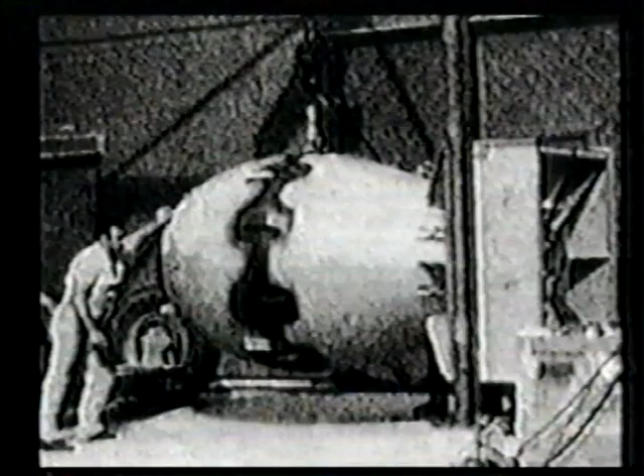In 1939, at Adolf Hitler's request, the Nazis were developing a bomb that would be so powerful and destructive they would surely win the war. Scientists were researching the possibility of taking radioactive particles and splitting them apart. Albert Einstein wrote a letter warning President Roosevelt about the plan and its implications.

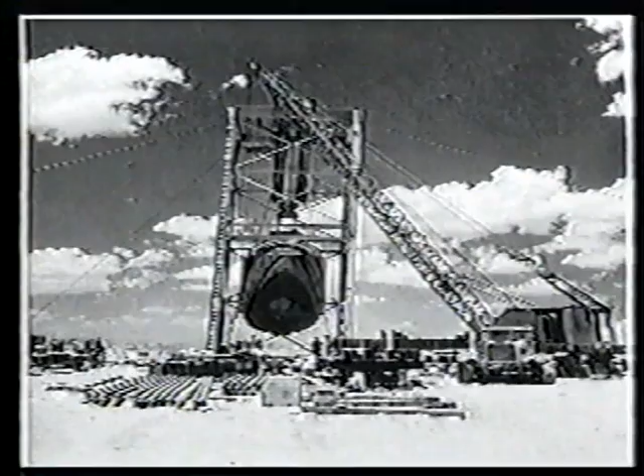The U.S. military initiated its own top-secret research program. It was called the Manhattan Project and was supervised by General Leslie Groves. In the development process, American scientists knew the hazard of chemical radiation poisoning to both researchers and the environment would be significant. Part of the Manhattan Project involved development of a new type of filtration that could be used in research facilities where radioactive materials were used, such as Los Alamos Laboratory in New Mexico.

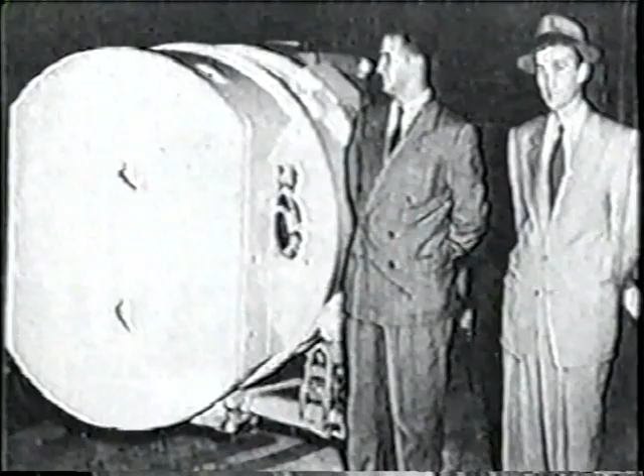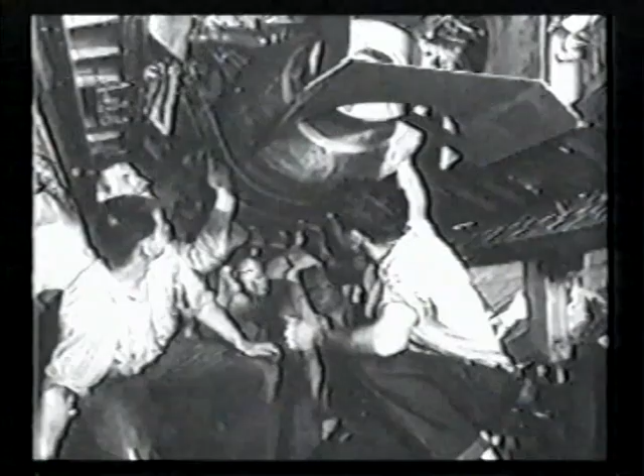The Arthur D. Little research firm was contracted to develop this new type of filtration. The new filters must be so sophisticated that even microscopic particles 1/300th the size of a human hair would be trapped. Ironically, they did not have to look far to find what they needed. British agents had smuggled top-secret plans out of Germany for a new type of gas mask filter that used microfine asbestos paper. The Arthur D. Little research firm decided to use the same design, improving it where they could.

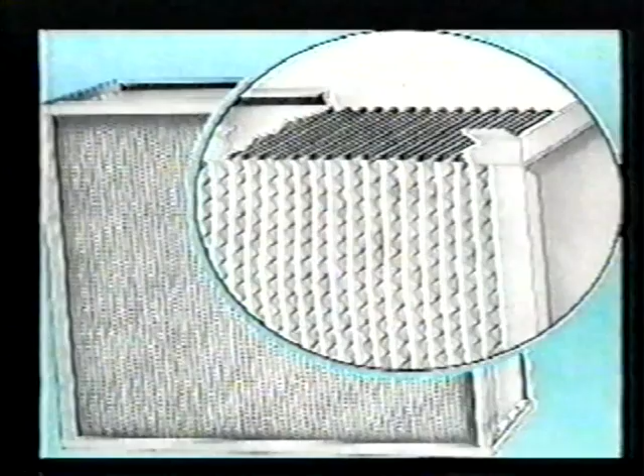The resulting filters were called nuclear filters, or absolute filters, because they were believed to filter out absolutely everything. Without a doubt, absolute filtration helped make possible the development of the atomic bomb. After the war was over, and after the plans for absolute filtration were declassified, the Arthur D. Little Company started a separate company to manufacture and sell their filters. The company was called Cambridge Filter Corporation and would be a commercial enterprise marketing absolute filters to the fast-growing nuclear power industry.

In 1961, an engineer named Humphrey Gilbert first used the term HEPA to describe these high-efficiency filters. HEPA was an acronym for High Efficiency Particulate Air Filters. Ironically, it wasn't until the early 1960s that Cambridge and other HEPA filter manufacturers stopped using asbestos paper in the filter media. Within a few years, HEPA filters would be one of the chief lines of defense against the very product they were once made from, asbestos.

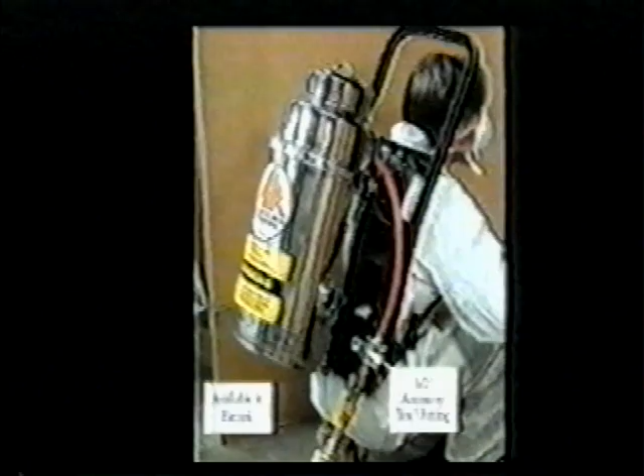So what's so special about HEPA vacuums? They cost a lot more than conventional vacuum cleaners. Is it really that big a deal? An average upright vacuum with new filters may have an efficiency of anywhere between 50 to 75%. This means that 50 to 75% of the particulate is captured by the filter. This also means that 25 to 50% is exhausted into the air.

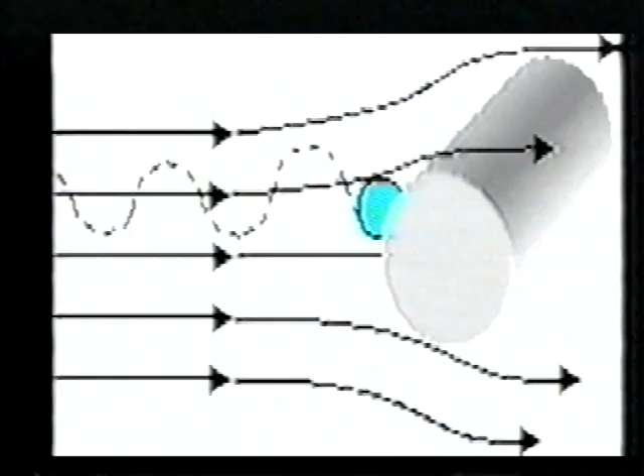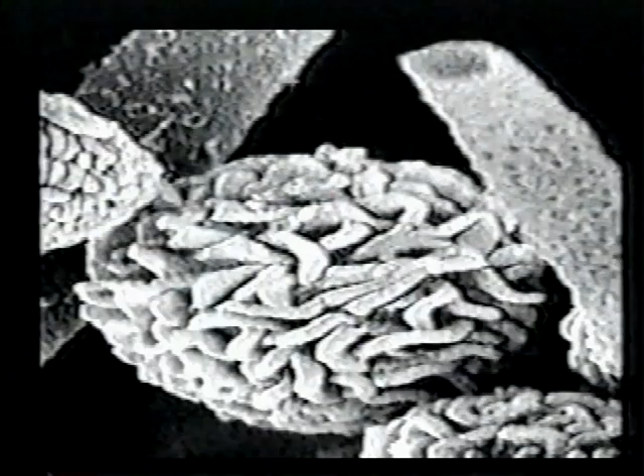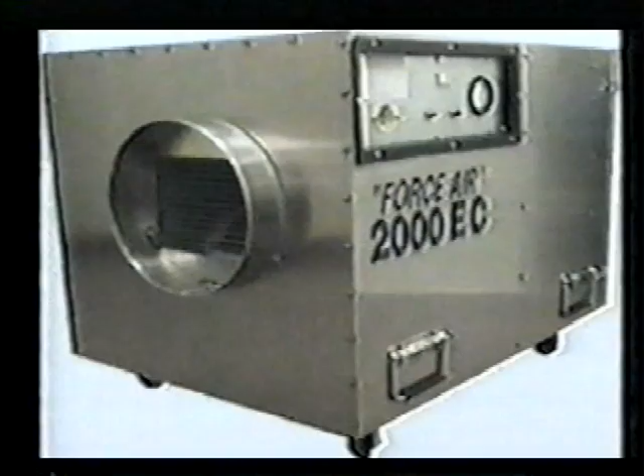As the filters collect more and more debris, the efficiency is actually reduced, and a greater amount of particulate is exhausted. If a vacuum is used to pick up hazardous materials like asbestos, mold, or lead, the most dangerous particles, the invisible ones, are the most likely to become airborne. Microscopic particles of asbestos, lead, toxic mold, or other hazardous materials can stay airborne for hours, even after the vacuuming stops. For this reason, state and federal regulations require the use of HEPA vacuums, HEPA-filtered respirators, and HEPA-filtered exhaust systems whenever hazardous materials are being disturbed.

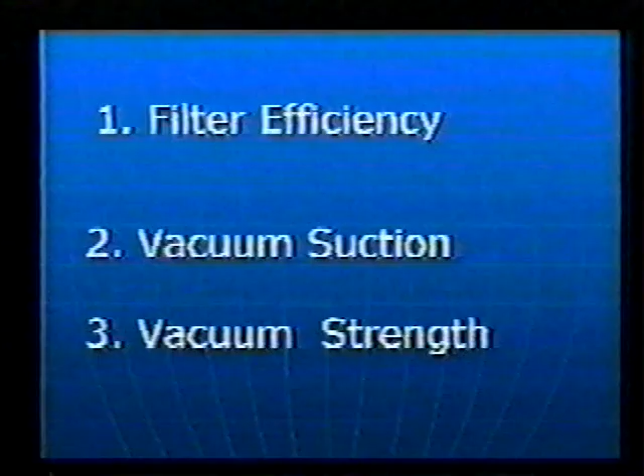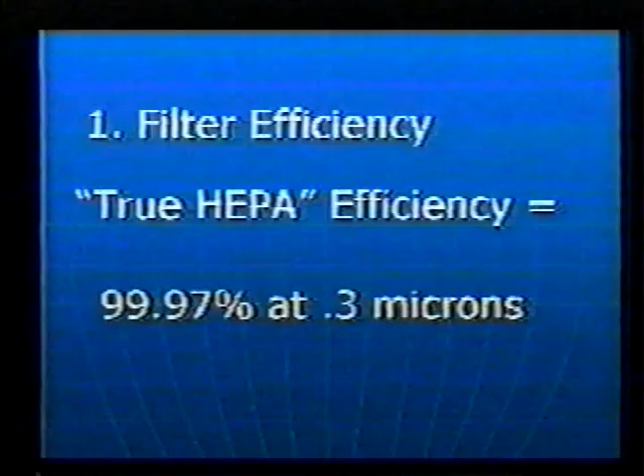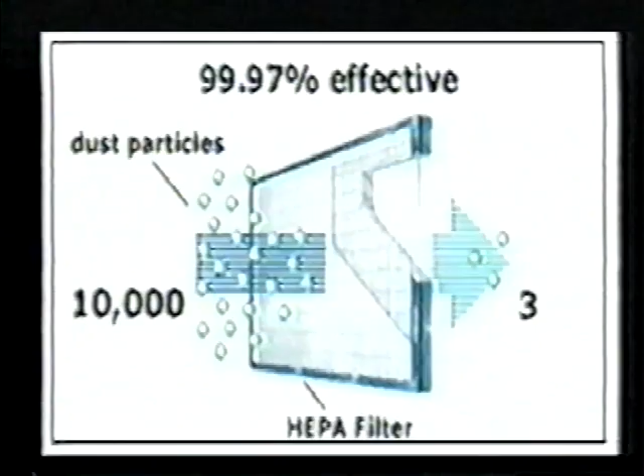HEPA vacuums are rated in several ways: filter efficiency, vacuum suction, and vacuum strength. Filter efficiency is listed in a percentage. For example, true HEPA filters must capture 99.97% of the particulate down to 0.3 microns in size. That means that for every 10,000 particles in the air or on the ground, only 3 may get through the filter. HEPA filters must also capture particulate down to 0.3 microns.

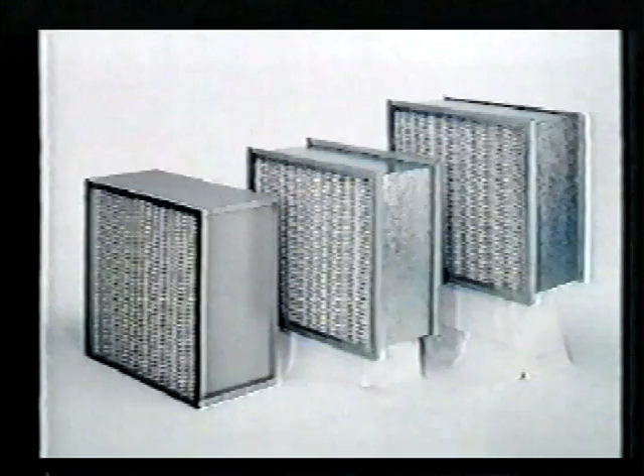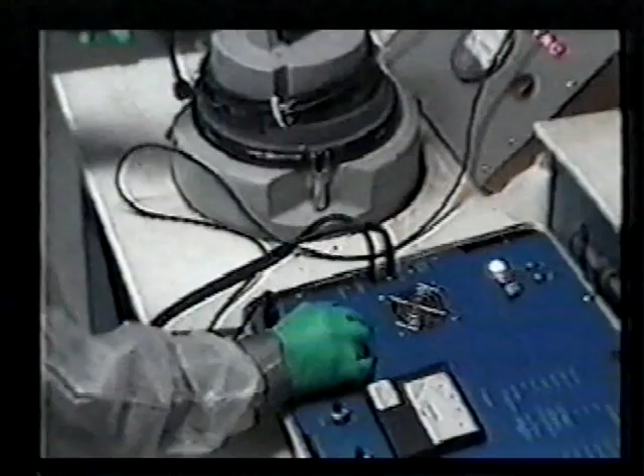A micron is 1/millionth of a meter. A piece of household dust might be 2 or 3 microns in size. 0.3 microns is 1/300th the size of a human hair. HEPA filters must be tested and certified to be 99.97% efficient down to 0.3 micron sized particles. Any filter that does not reach that standard is not to be used in hazardous material pickup. A second measure of vacuum efficiency is the amount of suction. This is often stated in terms of cubic feet per minute, or CFM.

CFMs are the amount of air the vacuum can draw in 1 minute. The minimum CFMs for a HEPA vacuum should be 85 to 90 cubic feet per minute. A third measure of vacuum efficiency is the power or strength of the suction.

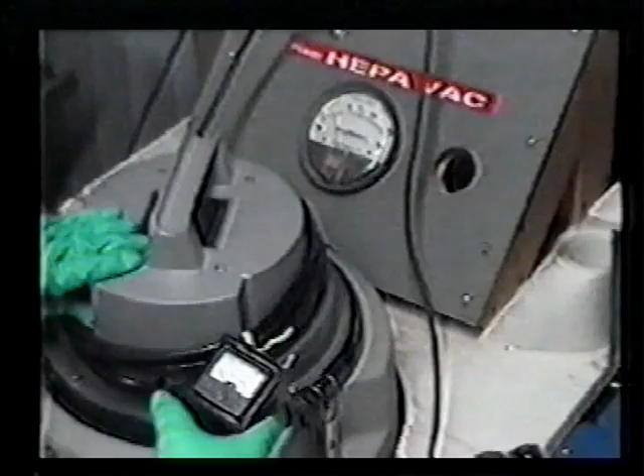CFMs measure the amount or velocity of air. Water column lift, or WC, measures how strong the suction is. Water lift is measured with a pressure differential, or magnehelic gauge. If you took a 1-inch tube with water in the bottom and held it vertical, how high would the vacuum sweeper lift the water? This is what a magnehelic gauge measures. You should look for a vacuum that has at least 60 inches of water column lift.

And don't be confused by horsepower or amperage ratings on vacuums. They don't really give a good base of comparison between various models. Just because one vacuum has a 2 horsepower motor and another has a 5 does not guarantee the 5 horsepower has better suction. It's best to look at CFMs and water column lift.

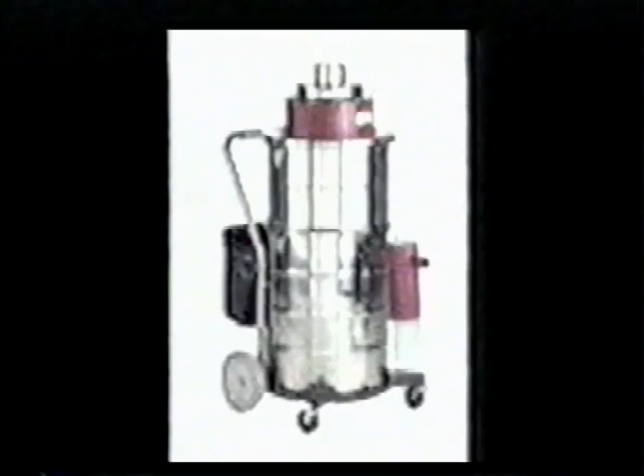In order to give true HEPA filtration, filters must be tested. HEPA certification is regulated by the American National Standards Institute. In order to be certified, a HEPA filter must be challenged with an aerosol known as dioctyl phthalate, or DOP. DOP is a type of oil with standard-sized molecules.

DOP aerosol is introduced to the upstream side of the filter and the vacuum turned on. A special light-sensing meter is then used at the other end to measure if any of the microscopic particles are able to penetrate the filter media.

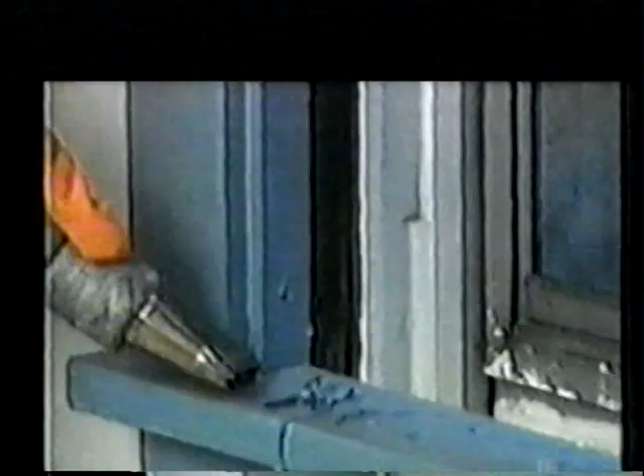At Fortress Environmental, we not only require that HEPA filters be DOP tested by the filter manufacturer, we also test them again ourselves after they've been installed on the vacuum head. This way, you can be confident that your HEPA vacuum will function at peak efficiency if used in accordance with manufacturer's specifications.

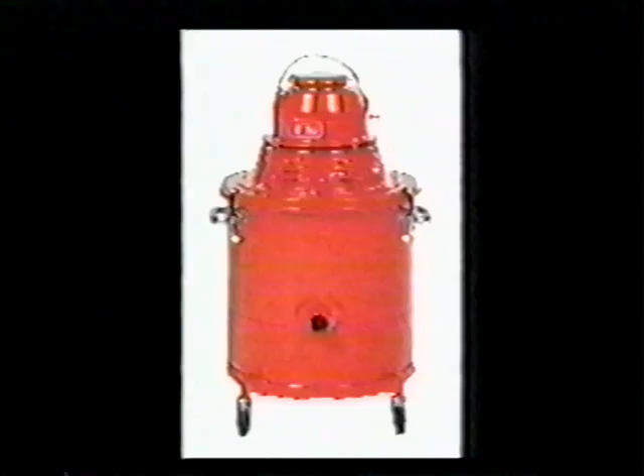A true HEPA vacuum is no mere shop vacuum. HEPA vacuums typically cost several times more than shop vacs, and like any equipment, must be used and maintained properly to ensure safety. When you first purchase a HEPA vacuum, and each subsequent use, it's a good idea to perform a basic safety and systems check. Check to make sure the vacuum head is fixed securely to the tank. Fortress vacuums utilize a stainless steel locking clip to guarantee no accidental opening.

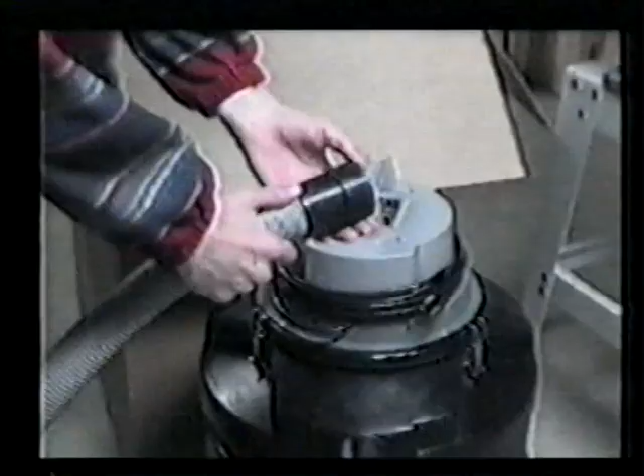Next, attach the hose to the intake port, making sure it's firmly attached. Turn the vacuum on and check the suction. Your HEPA vacuum should have enough suction to pull your hand tightly into the hose. If it does not, it's time for filter maintenance.

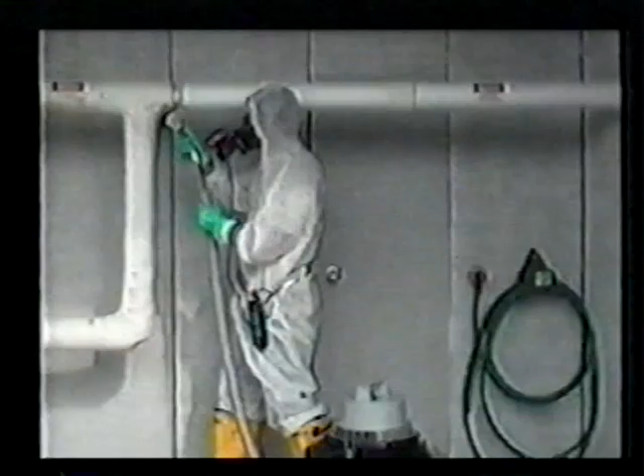Typically, your HEPA vacuum will be used in the pickup of hazardous materials like asbestos, lead, or toxic mold. Various state and federal regulations apply to the disturbance or removal of these hazardous materials. Depending on the job, personal protective equipment like filtered respirators, disposable coveralls, boots, gloves, and headgear may be required.

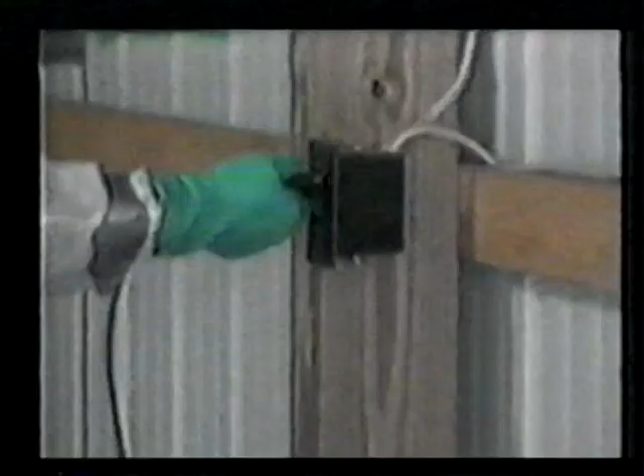Because of the risk of exposure to hazardous materials, it's important when using a HEPA vacuum to observe all state and federal regulations, as well as a few common sense rules. Always plug your HEPA vacuum into an approved receptacle. Fortress HEPA vacuums run on 110 volts and draw about 8 amps. Beware of attaching long extension cords between the vacuum and the receptacle or running other power tools on the same circuit.

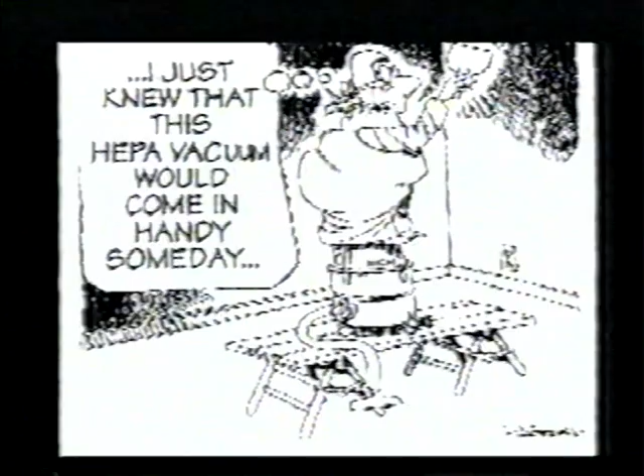Never dry sweep hazardous materials. Use a HEPA vacuum to minimize the danger of increased exposure. Always handle a HEPA vacuum with care. Never stand on it or drop it from a ladder or scaffold. Always carefully lower it to the ground.

Never eat or drink or chew gum when HEPA vacuuming hazardous materials. OSHA regulations forbid the presence of food or drink in contaminated areas. Always inspect your HEPA vacuum suction before each use. Make sure the head is securely clipped to the tank so that no hazardous particulate is released into the work area.

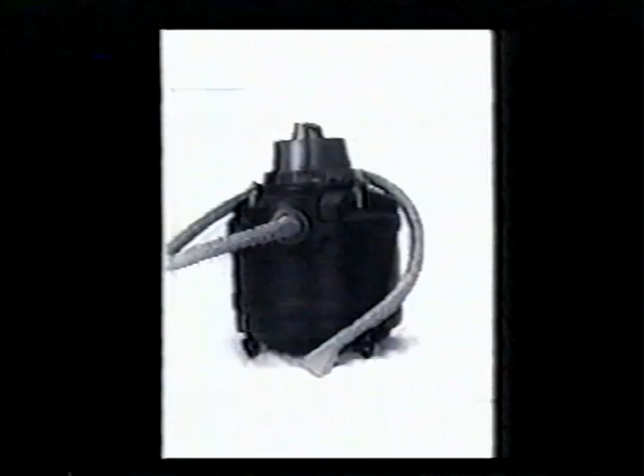For maximum safe vacuuming of hazardous materials, it is recommended that a HEPA vacuum have 3 stages of filtration. On a Fortress HEPA vacuum, the first stage, after the collection tank, is a cloth Dacron filter bag that wraps like a mitten around the HEPA. The Dacron cloth used in this mitten provides 40 to 50% efficiency and collects most of the visible debris.

The second stage of filtration is called the impact filter. The impact filter is a small, fibrous filter that protects the main HEPA filter from damage or impact by sharp objects, as well as providing another barricade against larger debris. Fortress has 2 types of impact filter, standard and antimicrobial, for use in restoration and mold cleanup projects.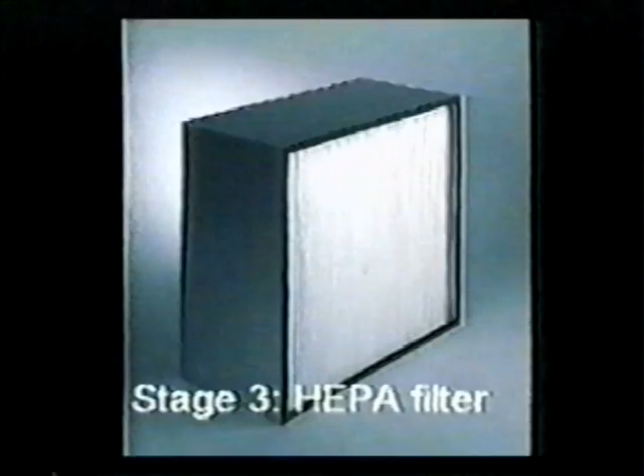The third stage is the HEPA itself. Fortress HEPA filters are DOP tested and factory certified to be 99.97% efficient down to 0.3 microns. In fact, Fortress vacuums are even more efficient than the minimum requirement. Fortress HEPA filters are Type A HEPA filters containing approximately 18.5 square feet of glass fiber filter media. Gasket material is oil resistant, expanded closed cellular rubber. Separators are corrugated aluminum, 0.038 millimeter thick.

For maximum safety and efficiency of your HEPA vacuum, it is essential that each of these stages of filtration be maintained properly. Maintaining the filters on a HEPA vacuum is the most important way to ensure safe, efficient operation. Proper filter maintenance on a HEPA vacuum involves 4 easy steps. There may be specific state or federal regulations depending on the type of material you're vacuuming. There may be a requirement for respiratory protection or protective clothing. If you don't know for sure, consult regulatory authorities.

Step 1. Remove the head. Empty the canister. Unlatch the 3 locking stainless steel clips and gently lift the head. Using a spray bottle with water, wet down the contents carefully to minimize dust release. If you're picking up regulated hazardous materials such as asbestos, you must place the contents in a properly labeled 6 mil disposal bag.

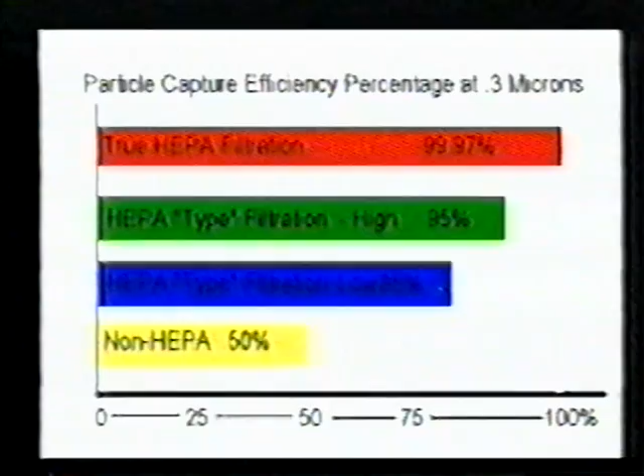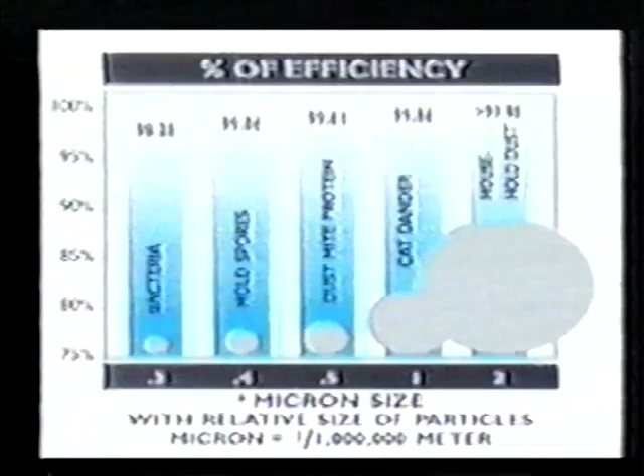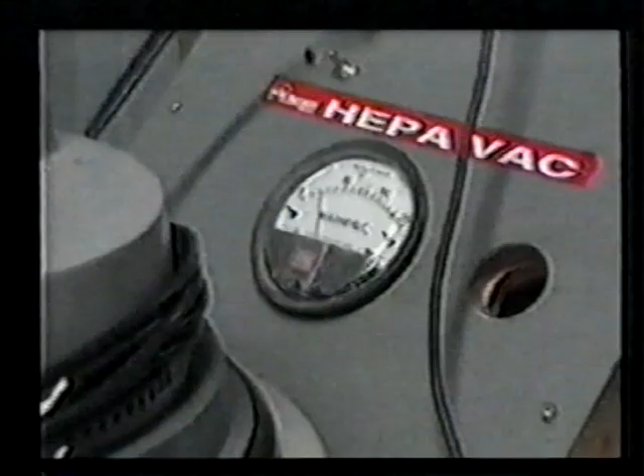With dozens of HEPA vacuums to choose from today, how do you select the right HEPA vacuum? There are at least 3 considerations in the selection process. Make sure your HEPA vacuum offers true HEPA filtration. Make sure that it is DOP tested and certified to be 99.97% efficient down to particles 0.3 microns in size. The second consideration is performance. When comparing HEPA vacuums, be sure to compare suction and velocity, not just horsepower and amperage. Horsepower and amperage ratings can be misleading. A true HEPA vacuum can cost anywhere from $400 to $3,000, depending on several factors.